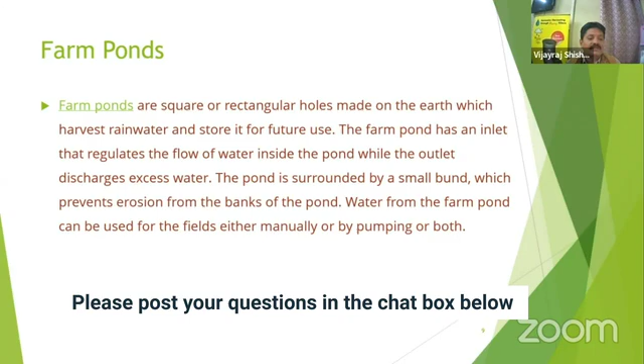Now, to come back, how do we improve this? When we get enough rainfall, how do we improve the water content of our soil or save water, so that we can have more crop per drop of water?

That is what Israel is doing. If you see Israel, you'll be surprised, because whenever we talk of examples of saving water, Israel comes to the forefront. With just 100 mm of average annual rainfall, as against our average annual rainfall of 1,270 mm, they are able to manage the water needs of their whole country, and they even export water to Jordan and Syria. If they can do it with 100 mm, why not us, with 12 times more rainfall than them?

So if you take this, what happens is, with just 25 mm of rainfall, or 1 inch, we get 1 lakh liters of water on a piece of land. Even if you consider the lowest rainfall of 500 mm, you still get about 20 lakh liters of water on just 1 acre of land.

As I told you earlier, because of the intensity of the rainfall and our inability to manage the water, this water goes to waste. Hardly 10 to 20% percolates, and day by day, as the carbon content comes down, the retention of moisture in the soil also comes down. It is all interlinked - as the moisture comes down, carbon content decreases, and once the carbon content decreases, the moisture holding capacity and nutrient holding capacity of the soil is lost.

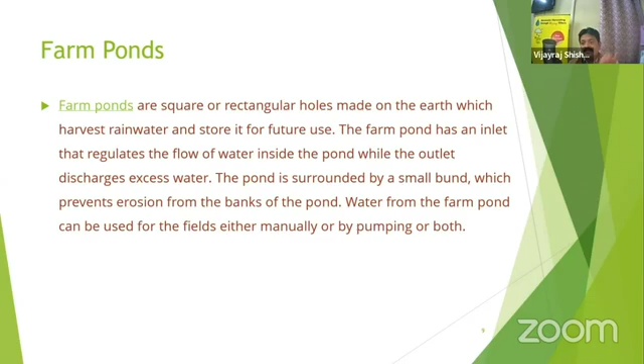These farm ponds can be lined with clay, the fine clay you get in the beds of lakes and ponds. We can line them with that so that water retention is there. Or now you have nylon based HDPE liners available. We can line them and store the water. But the best thing is to use clay, so that there is always life which can be there, because these black liners, due to temperature increase, cause more evaporation losses.

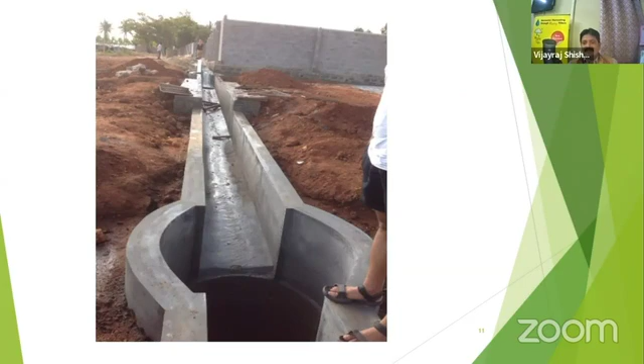These ponds can be done at the lowest point, as I pointed out. Before we leave the water to these ponds, we have to make a series of silt traps. These are concreted silt traps, but normal pits can be made, so that water gets into the pits and rises again by siphoning effect, so the heavier particles, mud and all, settle down. If you make a series of check dams or pits in the path of the water coming to your pond, it will stop the mud flowing into your lakes or ponds, so that you need not desilt them and the cost doesn't increase. This simple mechanism of making the silt trap will avoid silt getting into your ponds.

So here you are seeing, but whatever pond you are seeing here, this is not a proper methodology to make a farm pond, because if you make this pond without any shade, the evaporation losses are more than 50%. During the summer, when we require the water the most, there will be no water.

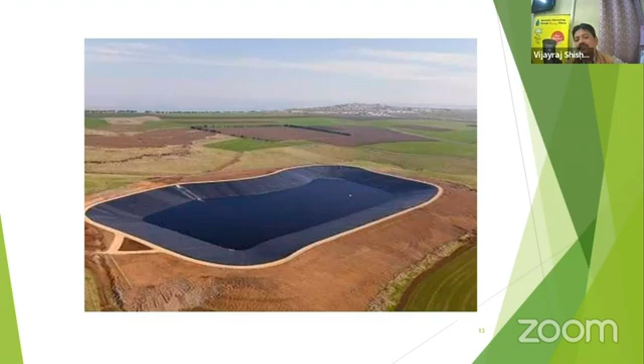This is one of the photos showing how the liner has been made, beautifully lined ponds which you can use for your farms. So what we are suggesting is, whenever you are making a farm pond, in the east and west, if you can create trees surrounding your pond, which can avoid direct sunlight to the pond, the evaporation losses can be avoided.

Otherwise, if you are making a pond, you can use a shade net. You can tie guy wires across it and put a shade net, so that evaporation, which is the major culprit in farm ponds, can be avoided. This can be done in a very simple methodology - many farmers I have seen in Kolar use old saris which are available very cheap, 5 or 10 rupees for a big enough synthetic sari. So they weave it together and make a shade net, and put it on the guy wires. You can use your own innovative ideas to avoid this.

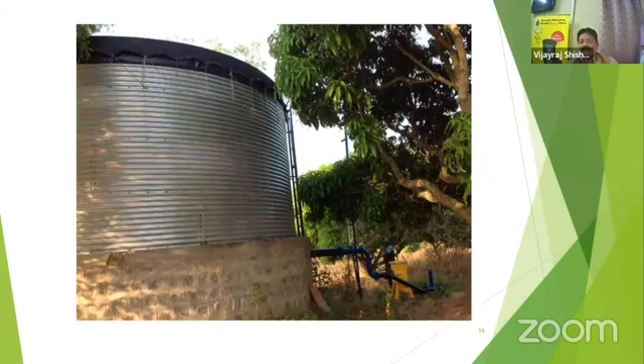Then, in case you have a higher altitude area - a majority of our farms today use drip irrigation - from this pond, because there will be a lot of water flowing during the rainy season, you need to store this water without it getting evaporated. So these cheap low cost galvanized tanks available these days can be put at the highest altitude. If you make the pond in the lowest area, on the higher side you make these kinds of platforms, raise them, and put a tank on that, and from there you can directly connect it to your drip irrigation system, so that by gravity only you can irrigate your land.

So if you put solar pumps during the daytime, these solar pumps will push the water from the ponds to these tanks. This will be stored, and whenever you want to irrigate, since these are placed at a higher altitude, with gravity only you will be very easily able to irrigate your land. Thereby you are saving, because today power is also a major concern - one of the major culprits for the farmers is power also.

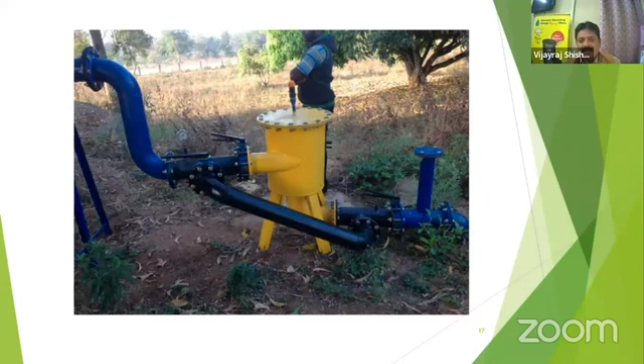Because you get power in the night, and in daytime you don't get the power, and that too you only get power for a small time. So you can make use of the benefits, because there are beautiful solar pumps which have come, which can be used, and you can just put a small activated silica sand filter, and then allow this water to go. Now my only thought is that we should rejuvenate all the wells that are abandoned now.

Because they play a very vital role in sustaining the farm moisture or the shallow level recharging. As we have only started taking the water from the deeper aquifer, this shallow water is already always available at 25 feet, 30 feet. Just to give you an example, in Bangalore's airport area, Devanahalli side, the water table in the borewell is about 1,500 feet deep. But we recently, last week, dug a well, and we got the water table at 35 feet.

So the shallow water is still available, because we are not extracting this water. This will help in a very big way to sustain our farm. And what happens is the flooding will not happen. And when we have got feeders to this, where we are making silt traps, this will avoid your precious soil from going out of the farm.

Because what happens when the intensity is more and you don't have any checks to stop this soil erosion, it will take away all your nutritious soil, because the only yielding soil is just 36 inches. Rest all is waste. All your crop grows only because of these 36 inches of soil. This is the nutrient rich soil, and the carbon content is there. This is the soil which helps you grow your crop. So you have to sustain this soil.

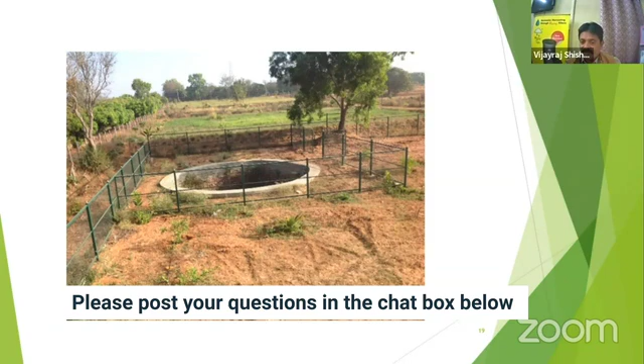That will help in sustaining your soil also, the soil erosion that is happening, and it will save the precious soil in your land, and the water also. The concept should be: you should not allow a single drop of water falling on your land to go outside. Rather, you should get water from outside to your land.

Make a well, make a pond, make small check dams in the storm drain, which gets water to this pond as well as to the well, and make a few silt traps. There also the water sustains. So like this, you can make your own full sustainable ecosystem of water, wherein you save this kind of water.

So that instead of taking one crop, you can go for the second crop also, because the water is available. And if you are going for two crops, you can go for the third crop. In the well also you'll get water, in the pond also. Just as a standby, you need to go for a borewell, because every land has got 1, 2, 3 borewells. So what we are supposed to do is, the excess water from this pond, or when the well is filled, we need to recharge our borewell.

We don't remove the water during the rainy days. For at least 150 to 200 days, we need not switch on our borewell at all, and sustain the water there. When you are doing this rainwater harvesting, it is not only improving the quantity of the water, but it will also improve the quality of the water.

What happens is, if you see in the borewell water, as we go deeper and deeper, the water quality deteriorates, because of a lot of minerals, and the joints, and then there is hardness in that, which is not good for plants also. If it is not good for human beings, it is not good for plants also. So the shallow water is the softest water and the best water for the plants. As we drink the water, the same way it gives the effects to the plants also.

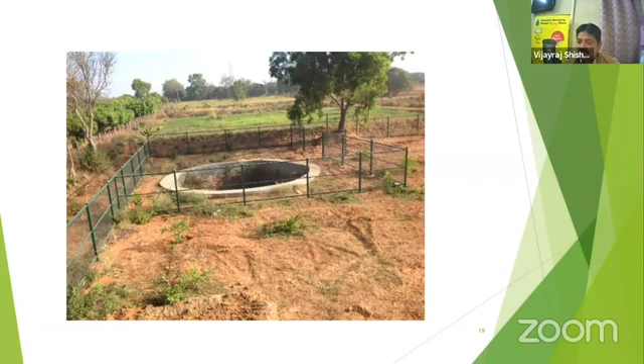So what happens is, if you are using this shallow water from your pond and the wells, your plants will grow well, and you'll have very good yields. And then when you are using this excess water to go into the borewell, that will not only increase the yield in the borewell, but also reduce the salinity and hardness because of the dilution effect. So that will be a very good boon for you. So rainwater plays a very vital role.

Now, if you have got horticulture crops, though drip irrigation consumes only 30 to 40% of the water that you use for furrow irrigation. But in that also, if you're using a horticulture crop, there is what is called Gutuku Niravari. Gutuku Niravari means, when you are putting a horticultural crop, let's assume a guava plant, when you make a trench, you should take a 1-2 inch pipe, and in this pipe, after leaving 8 inches from the bottom, you should make the holes.

In the pit, before you plant a tree, you place this pipe, and in this pipe you put 10 mm or 6 mm gravels, and then you place the plant. Then whenever you are getting your dripper, put it into this. So there are two advantages. One, this will only put the water to the root. There is no water at the top, so there are no evaporation losses. So this will take 30% of the water required in drip irrigation. So you're reducing your water consumption hugely.

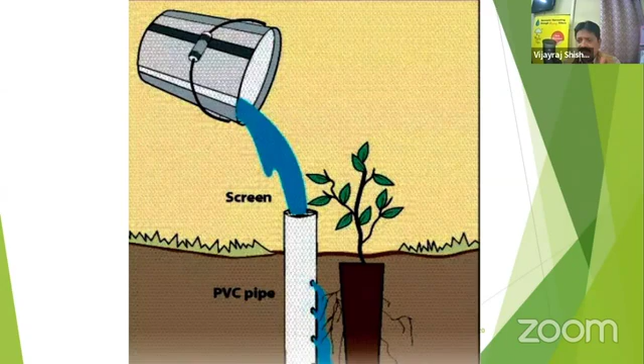So during any drought also, you can sustain your plants by just giving 1 gutuk of water. It's called Gutuku Niravari because by giving 1 gutuk of water, you can sustain your plants. So that is one of the main methods you can adopt, and all this rainwater that you have stored, you can use. So even if you have a drought, you can sustain your farm. This is one of them.

And here, how it helps: if you're retaining the moisture content, and I have been repeating this, it will help you to increase your carbon content and increase the moisture of the soil. That will really help in boosting your yield. At the end of the day, we are working to boost the yield.

And when we are using rainwater, see, rainwater is highly oxygenated water when it is coming. It is high in nitrogen and high in oxygen, because when lightning happens, nitrogen fixing takes place. You have all studied this, because you have come from a science background, so you understand how nitrogen fixing takes place. And when the water comes from the clouds to the ground, it absorbs a lot of oxygen.

You must have observed that even if we water our garden every day, in our house or in our plantation, whenever it rains, the color of the whole thing changes. You can see a visible difference between one rainfall and watering every day. It is because it's highly oxygenated, oxygen-rich water, which is required by the plants. So you can see a lot of difference when it rains, but even if we water every day, we'll not see that kind of change. So rainwater plays a very vital role today.

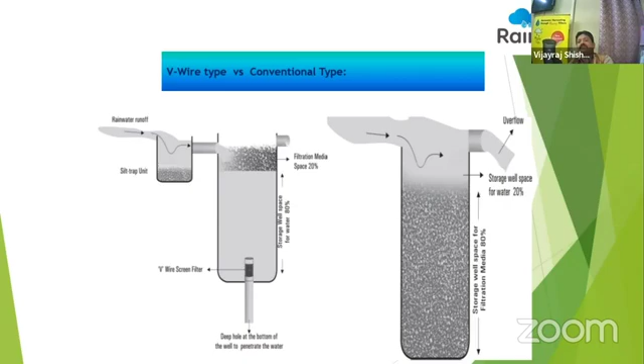Hardly the last 2 or 3 months, let's assume March, April, May, these 3 months are crucial, where we may not get water in the wells. These 3 months can be sustained through the borewells we have, which we have recharged during the rainy season. So this is a methodology.

Because of the constraint of time, I'll not go much into all the technological factors of this recharging. My friends, I can share these videos with you, and you can always contact us. We'll be able to help you out and guide you on how to recharge the borewells.

Here, you can see in this picture, we allow all this water which is running off, in case we have got a confined zone where there are no pesticides and nothing. Then we can recharge the borewell, not otherwise. If you don't know the water which is coming, then you need to do an injection well.

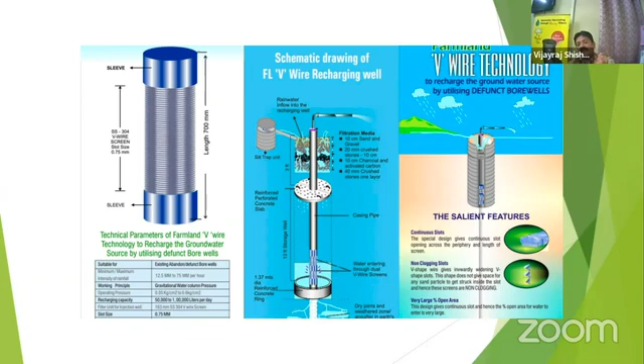But if the water is coming from your own field, where you are doing organic farming without using any pesticides, then you can do this kind of structure and recharge your borewells, wherein you pass this water through a fortified filtration media, and then this water enters your borewell, which in turn increases the yield of the borewell, and the quality of the water is also taken care of because of the dilution effect.

So this is the injection well system, wherein these kinds of structures are made next to the borewells, and then there is a silt trap. You allow the water to come into the silt trap, and this water gets filtered through the filtration media at the top, and then, as I told you earlier, bypasses the overburden of clay and rock and goes to the first permeable zone. Thereafter it gets filtered through the earth crust and then reaches your borewell.

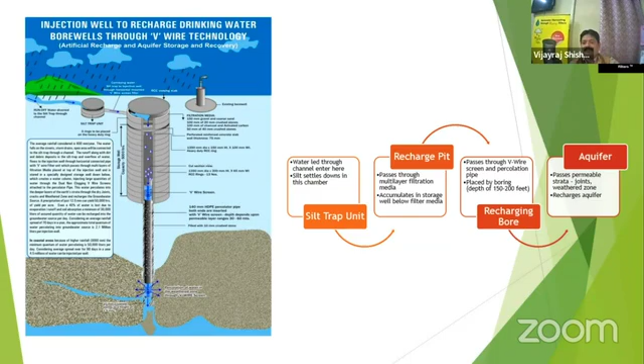So if you are using this water for drinking, this water will still be the safest, because if you take the filtration capacity of 1 meter by 1 meter of compressed earth, no filtration system in the world can match the filtration that can be done through the compressed earth crust. So before we do any of these structures, vertical electrical sounding is done, a proper understanding of the soil strata, so that you can bypass this kind of earth and go to the first permeable zone.

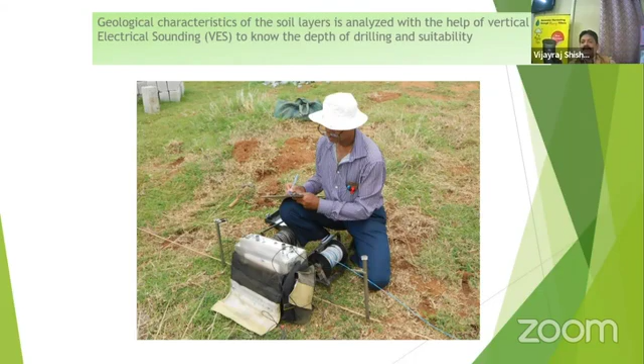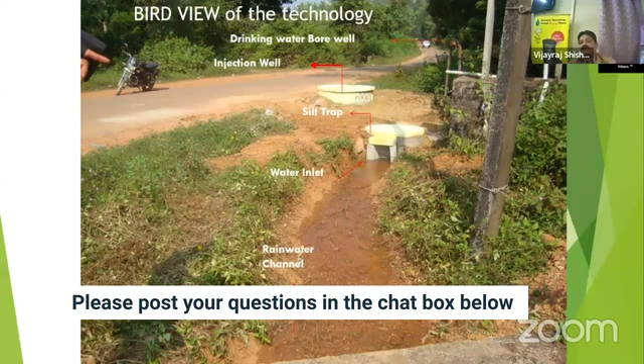So what we have done is, next to the borewell, we have made an injection well and a silt trap in the storm drain. So the water which would have otherwise gone down to the low-lying areas is stopped there. From there, it is sent to the injection well. From the injection well, it goes to the first permeable zone after getting filtered through the filtration media, and then it recharges the borewell, which is about 10 to 15 feet away, because the water's characteristic is always to move from higher concentration to lower concentration.

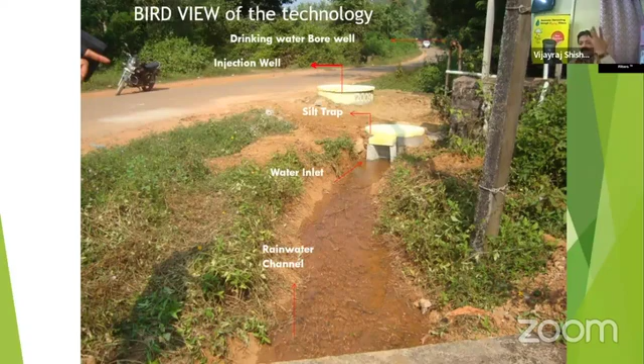Because of the extraction of the water from the borewell, the surrounding area of the borewell would have become dry. So when we put a lot of water in the injection well, the water tends to get filtered and move towards the borewell. So when you insert a camera after proper recharging, you would see a lot of horizontal fissures, water coming out of these fissures horizontally, not only the water from the bottom. So this will improve the quality and the quantity.

We have done a lot of case studies, also by our present secretary, Mr. Naveenraj Singh, who gave us a dried borewell, and then with this technology, we could recharge his borewell, put the solar pumps, and you can see only his farm is green. So like that, we have got more than 14,700 such case studies where we have recharged the borewell successfully.

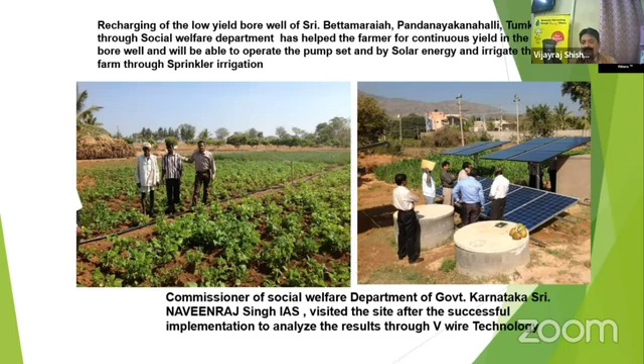It is not rocket science. It is simple technology. Whatever water we have extracted, by using some common sense and scientific reasoning, we have allowed this water to percolate. The whole concept, as I told you earlier, and I'm repeating, is we should not allow a single drop of water from our land to go out. We should store it, recharge it, and reuse it. So this is how this technology has helped.

This is a small video I would like to play. It's hardly a 1 minute video.

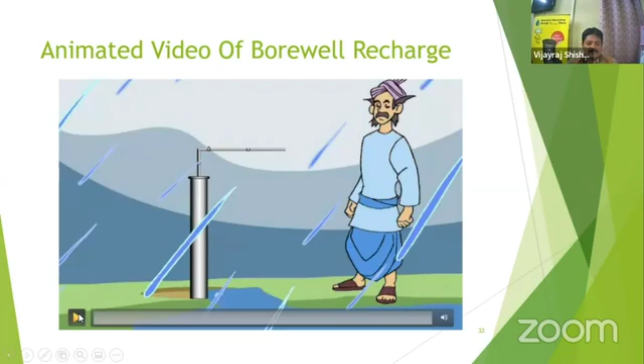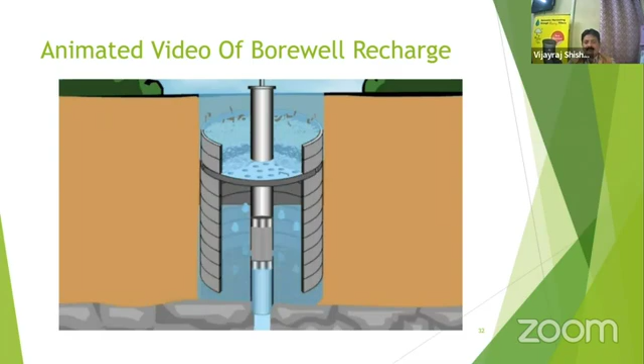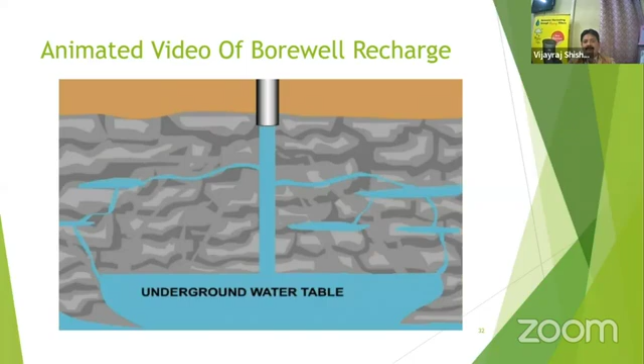There are many videos which we have. If I have got 2 minutes, I can play this video. Can I, ma'am? Yeah, you can play, sir.

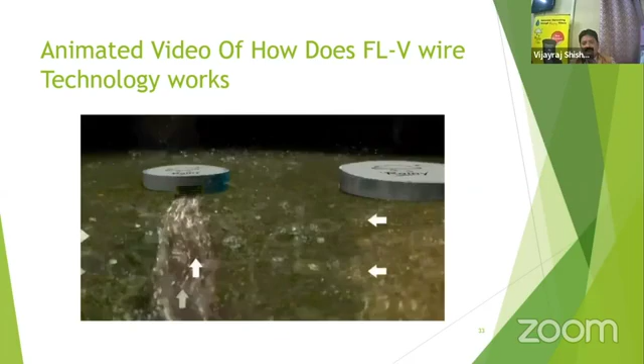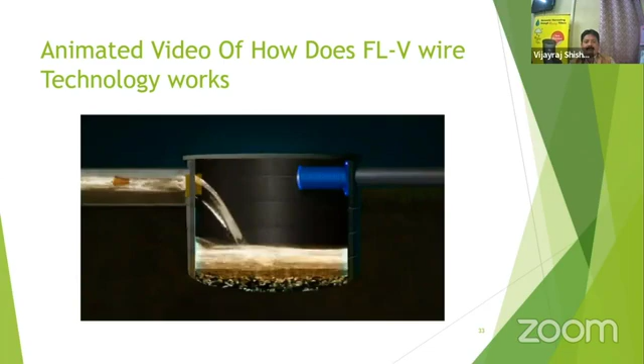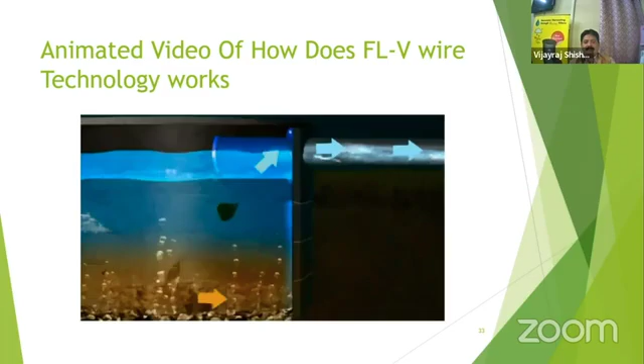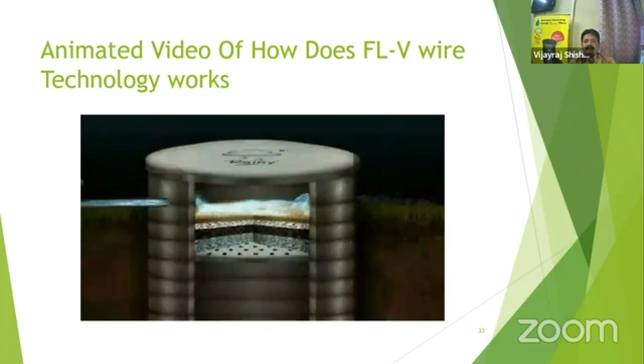Surface runoff is diverted through a water channel to a silt trap. The silt, leaves, dust, and debris settle in the silt trap. And the clean water is led into the injection well, passing through multi-layers of filtration media placed at the top of the injection well. The runoff water is accommodated in a specially designed storage well, which creates a well-defined water column, injecting large quantities of water into the deeper layers of the semi-impervious soil strata through the non-clogging V-wire screens attached to the specifically designed percolator pipe, placed to a depth of 30 meters below the ground.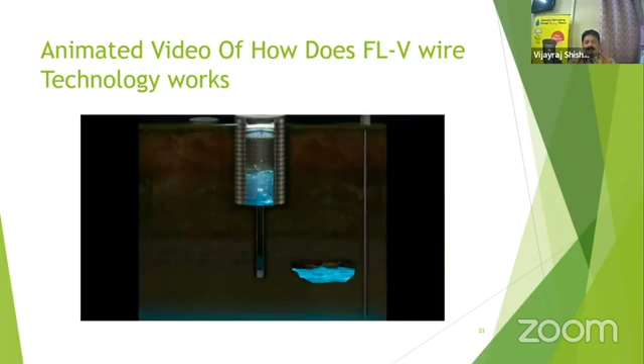The water column and the dual V-wire screen facilitate the filtered rainwater to reach the weathered and permeable zone. Thereafter, it becomes easy for the water to percolate into the deeper layer of the earth strata by capillary action through dry joints and cracks. Farmland Rainwater Harvesting Systems has developed this unique V-wire injection well technology to recharge and replenish the groundwater source. This technology has found wide acceptance both in public and private sectors because of its quick success rate to replenish the dried and depleting bore wells.

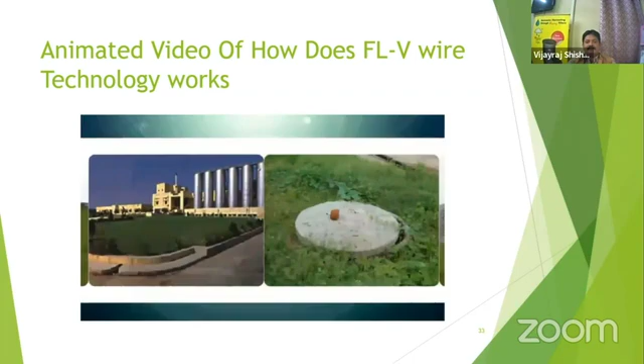More than 14,700 installations of this unique V-wire injection well technology have been installed pan-India in various government-sponsored projects under National Rural Drinking Water Supply Programs, Suvarna Jala, and also through various Zilla Panchayats, Gram Panchayats, municipalities, Nirmiti Kendras, urban water supply boards, rural water supply boards, groundwater development agencies, Konkan Railways, industries, and apartments.

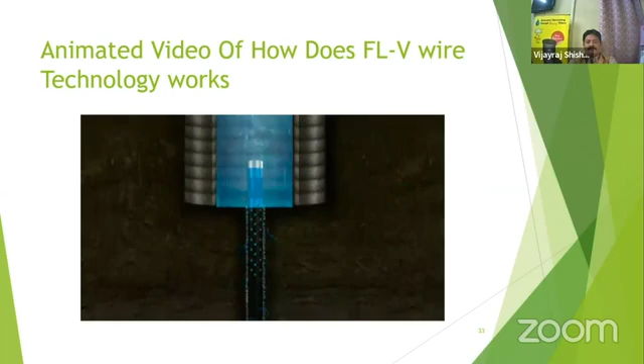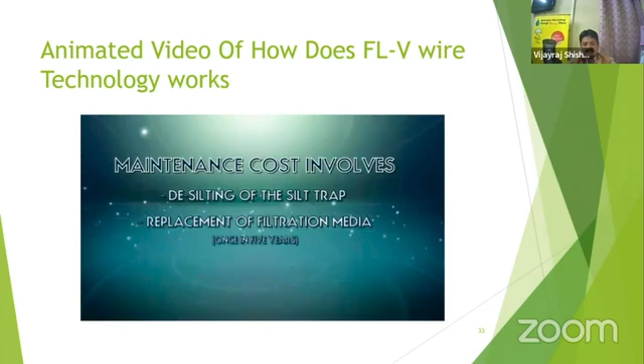This technology not only helps in replenishing the groundwater source, but also tremendously improves water quality through filtration and dilution effect. Farmland V-wire technology does not employ any moving parts. The lifespan of the material is a minimum of 20 years. The maintenance cost involves desilting of the silt trap and replacement of filtration media once in 5 years. Groundwater recharge will bridge the gap between acute shortage and available water during the peak summer months, and the groundwater reserves will remain intact for future generations.